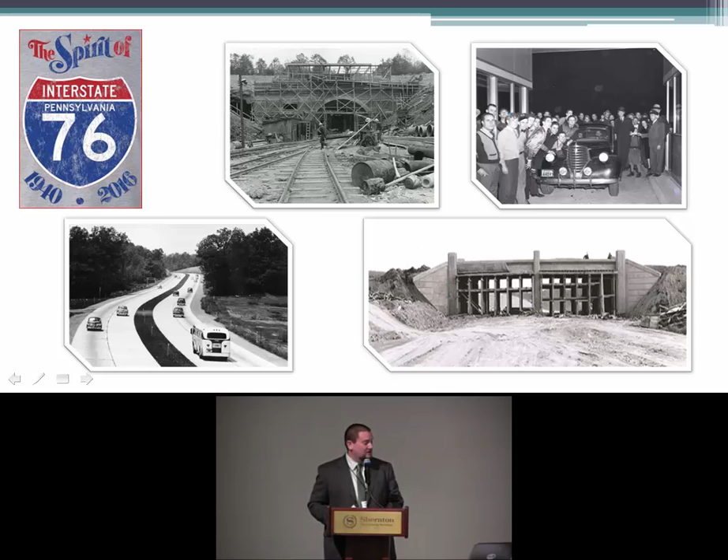Last October 1st, we celebrated our 76th anniversary of the Turnpike, which officially entered service in 1940, exhibiting new concepts in superhighway design and demonstrating that revenue bonds were a way to finance a toll road. Turnpike planners originally predicted that 1.3 million vehicles would travel the Turnpike in a year, but early actual traffic was 2.4 million, with sometimes as many as 10,000 vehicles a day.

The original Turnpike ran from Irwin to Carlisle, 160 miles, and now we have over 550 miles that we own and maintain. We were America's first superhighway, and we continue to work very hard maintaining and transforming that into tomorrow's superhighway.

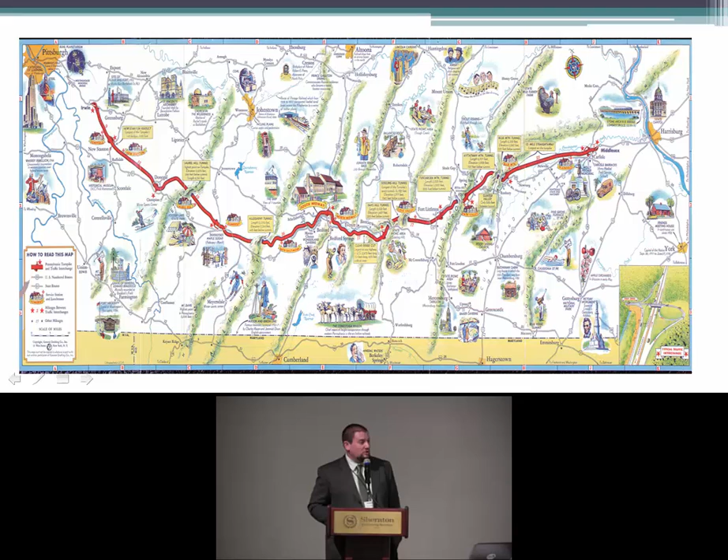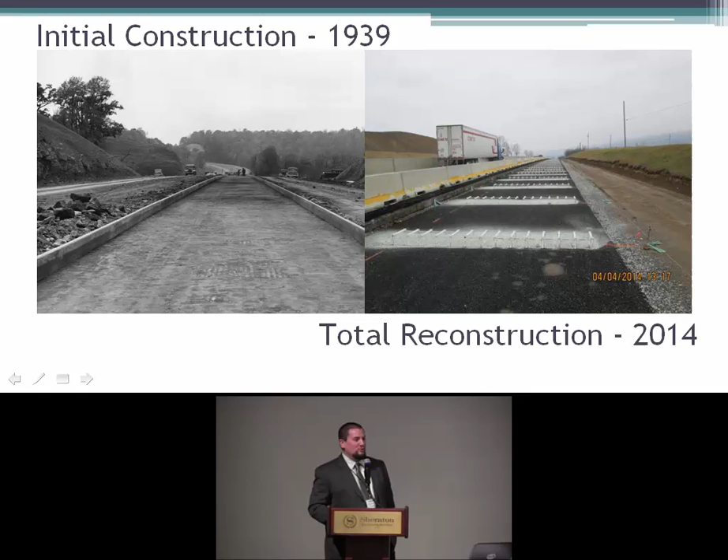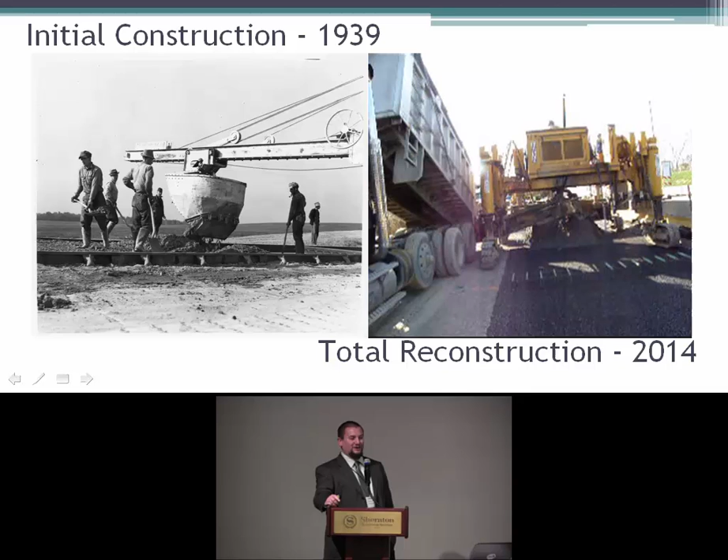Like the concrete industry, we've evolved over the years. In 1939, it was all form work, and now we're looking at all slip form paving. Could you imagine an inspector allowing four different guys with shovels moving concrete around in today's industry, versus material being transferred directly into a vehicle for placement?

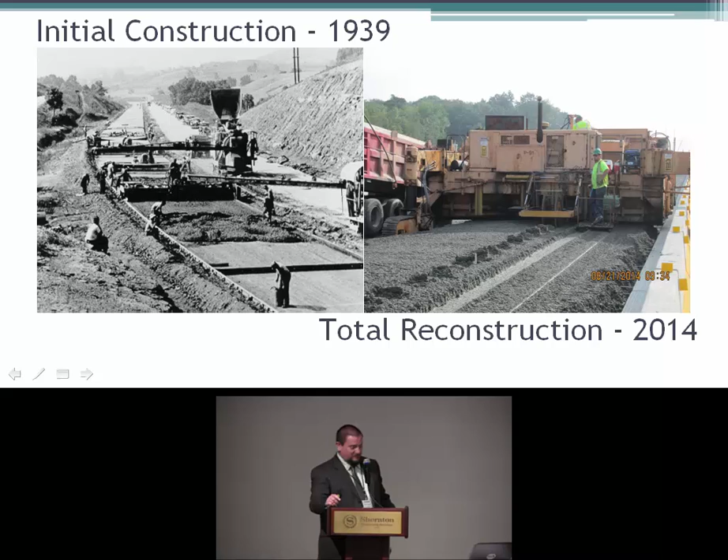That's an actual picture from the Turnpike paving operation in 1939 versus what we did in 2014 with a total reconstruction in concrete. How about a finisher? Really, that hasn't changed that much, in my opinion.

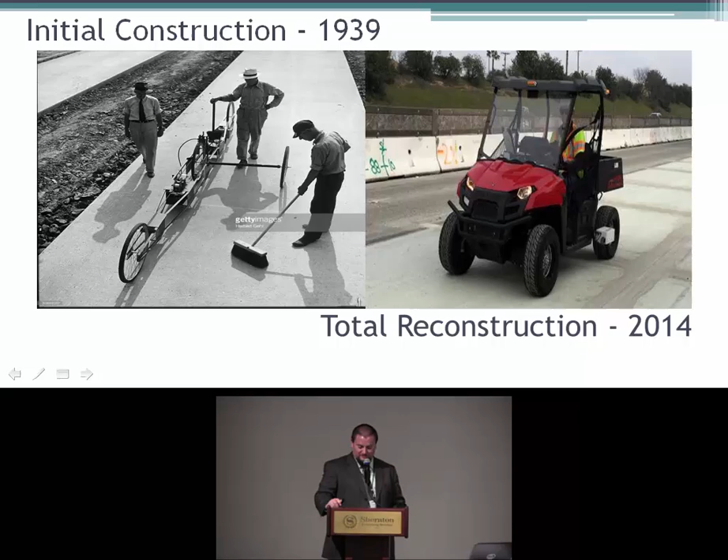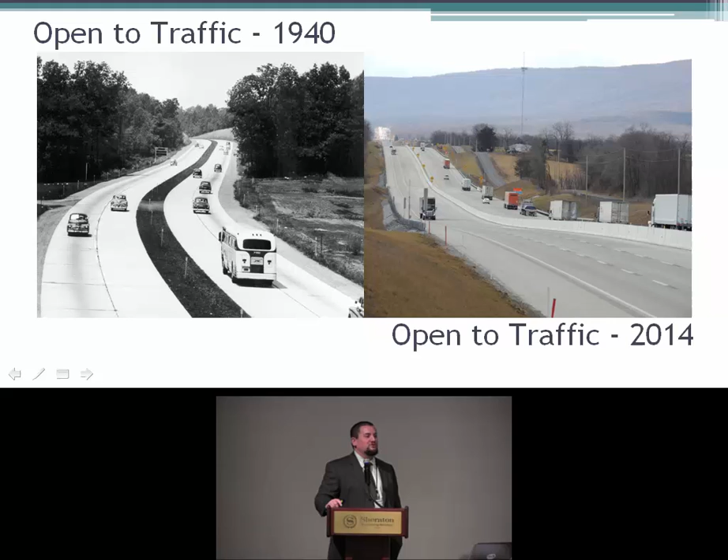But how about an old profilogram versus an ultralight profiler today? There's a big difference in technology and innovation over the last 76 years. Opening to traffic, 1940 versus 2014 with a concrete pavement—the big difference you can see is the amount of trucks the Turnpike saw in 1940 versus what we see today.

Customer service has always been one of the driving points with the Pennsylvania Turnpike. It's clear with our MPT patterns and the time sequence that we allow contractors to set those patterns. But it's through the investment in our capital plan that we're trying to build this bridge to zero fatalities.

For those of you who attended APC back in the fall, Brad Heigl, our chief engineer, touched on this in more detail, so I won't go too deep. But the independent program at $323 million is our Southern Beltway and Mon-Fayette Expressway, which is very actively funded through the oil franchise money from Act 89. I'll provide more detail on that independent program later.

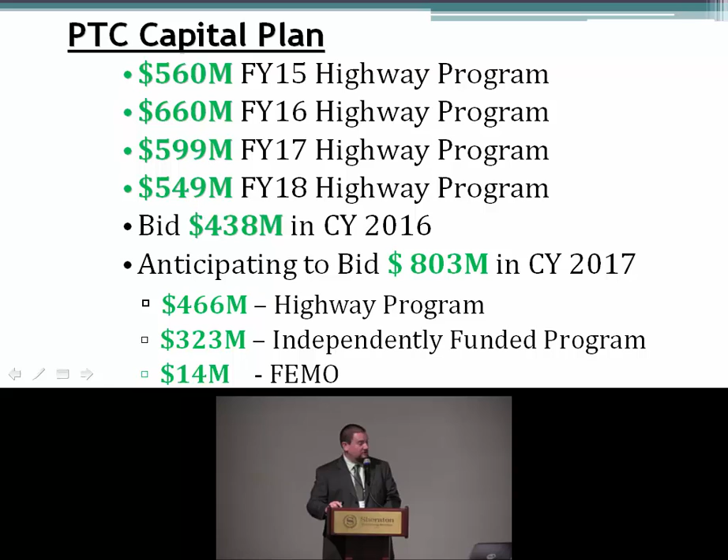We've dropped a little bit to $600 million in fiscal year 17 that we're in right now, and fiscal year 18 drops a little bit more. Previous capital plans: fiscal year 15 was $560 million, fiscal year 16 was $660 million. You can see how the capital plan has grown over the last 5 years.

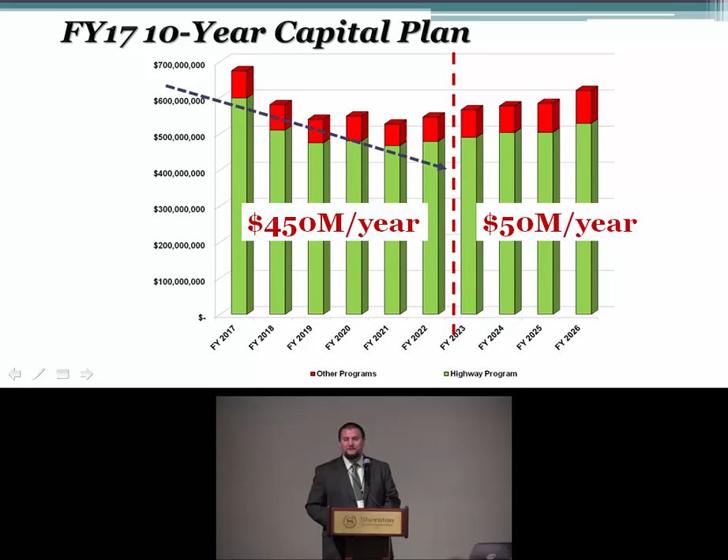So where are we going in the future? In 2022, our payments to PennDOT are supposed to decrease from $450 million a year right now to $50 million a year by Act 89. But there's some concern at the commission that this isn't actually going to sunset, so we want to be in a good position to react if it stays at $450 million or doesn't go down to $50 million. That's the reason we are flatlining our capital plan from fiscal year 17 out.

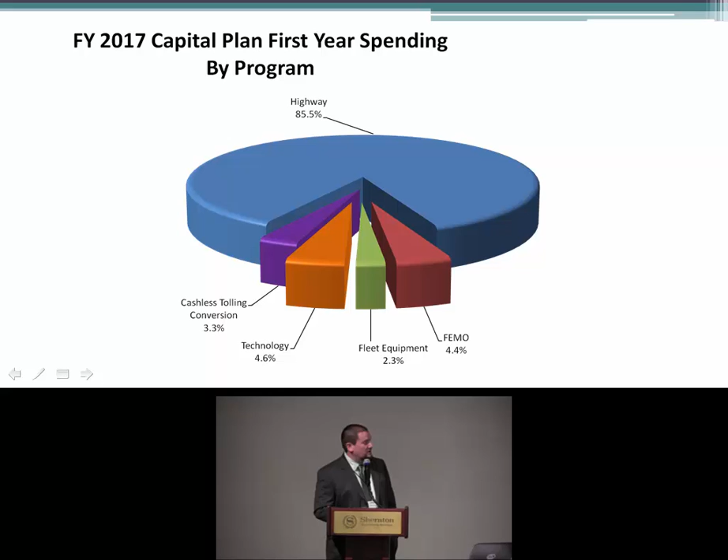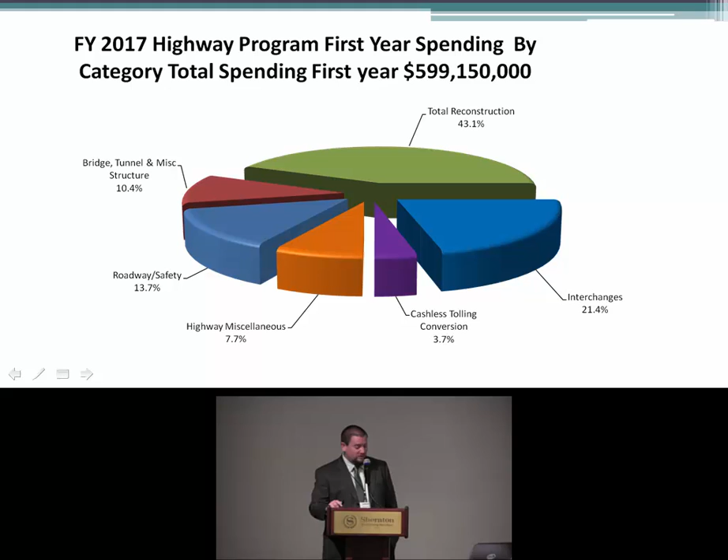Our fiscal year 17 capital plan as it is now, the highway program competes against all the other programs within the commission, but we are by far the largest program with almost 86% of total funding. So how does that break down into individual programs? The big one is our total reconstruction, followed by our interchange program, then roadway and bridge, followed by miscellaneous and our cashless toll conversion.

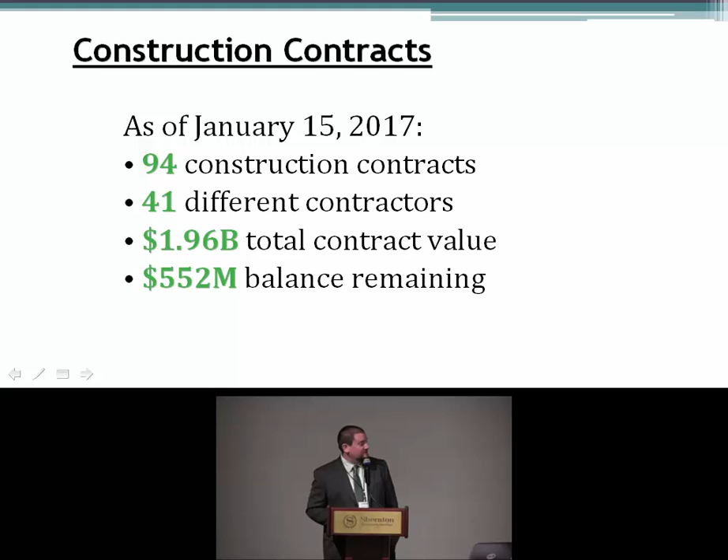So where do we stand today? Well, as of last month, we have 94 active construction contracts with 41 different contractors performing those contracts. A total value of $1.96 billion out in construction, physically in construction or awarded to go to construction, with another 552 remaining for this fiscal year. It's a pretty big number.

So with that program, how do you achieve quality work? One way is through TQI, the Transportation Quality Initiative. We're very engaged and continue to focus on TQI along with John Becker and the concrete industry. We fully agree that the effort that goes into this program and what comes out of TQI is the way that quality transportation projects are going to be implemented across the state.

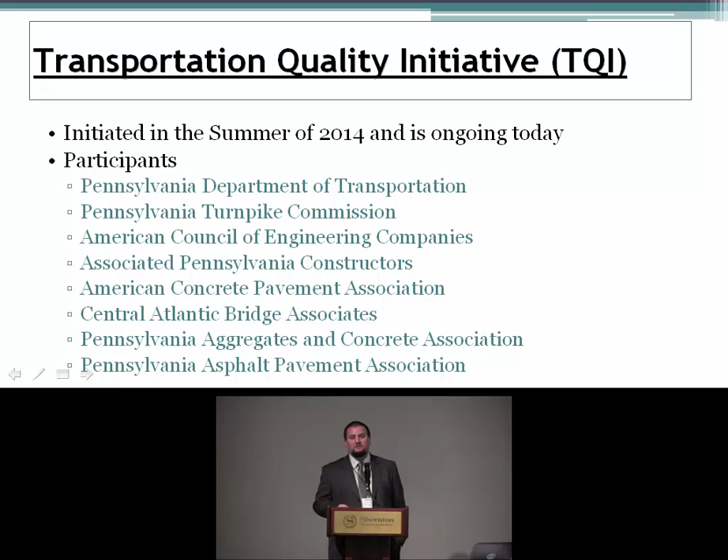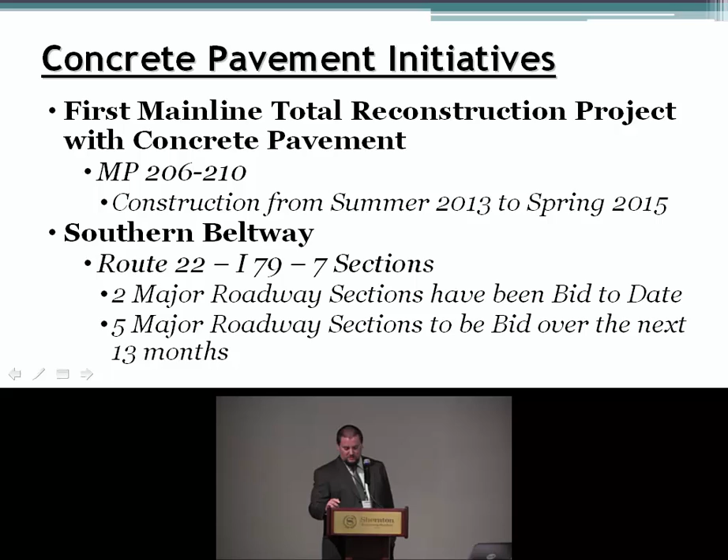So let's talk about some concrete pavement. Back in 2014, the big pilot program that everyone was watching was total reconstruction of milepost 206 to 210 in concrete, which was our first concrete pavement that we did in total reconstruction. Also, we have our Southern Beltway, Route 22 to I-79. There are 7 sections in design. 2 have been bid, 5 more will be bid over the next 13 months.

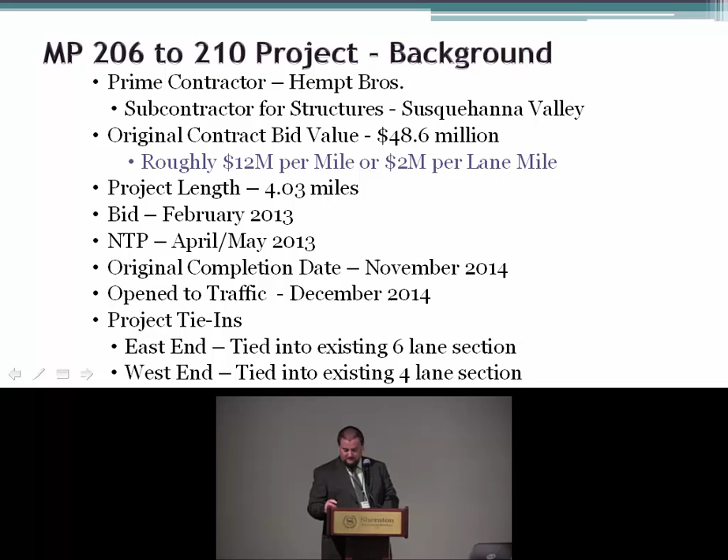So let's touch a little bit more on our 206 to 210 project. Roughly 4.03 miles, about $49 million. What's that break down to? About $12 million a mile, or $2 million a lane mile. But what do we get out of that? So it's been finished, traffic's running on it for second year now.

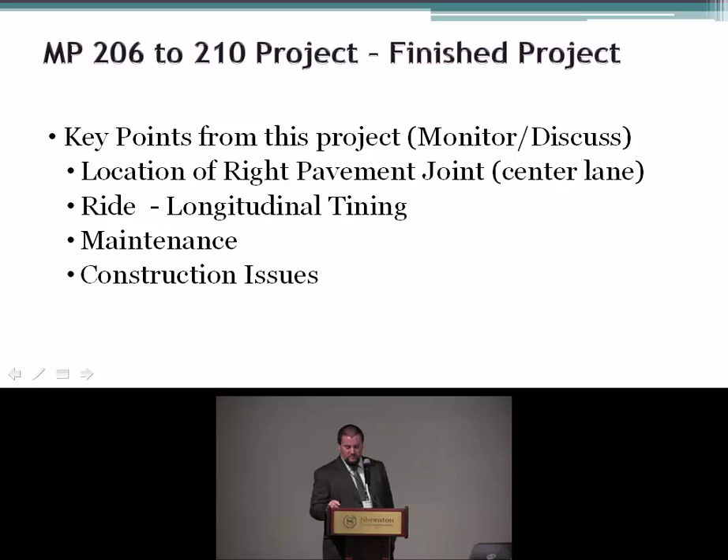Key points that we got out of this project that we continue to monitor and discuss internally: location of the right pavement joint. This just came up yesterday again internally. Our pavement joint is 2 feet into the right lane or the center lane. The ride quality, longitudinal tining, long-term maintenance of this pavement, and construction issues that came up that we're still discussing.

When you break in all your bridge structures and your culverts, you have to account for all your gaps for your EPOs, your contractor access. So you have to be aware that when you're paving concrete, you're going to occupy 2 lanes, and when you're only building 2 lanes at a time, this comes into a real problem. You also have your post-pavement restrictions, your cure time, your sawing and sealing. You also have to consider our median drainage was designed very shallow, so we couldn't run in the median until it was paved, which caused construction issues.

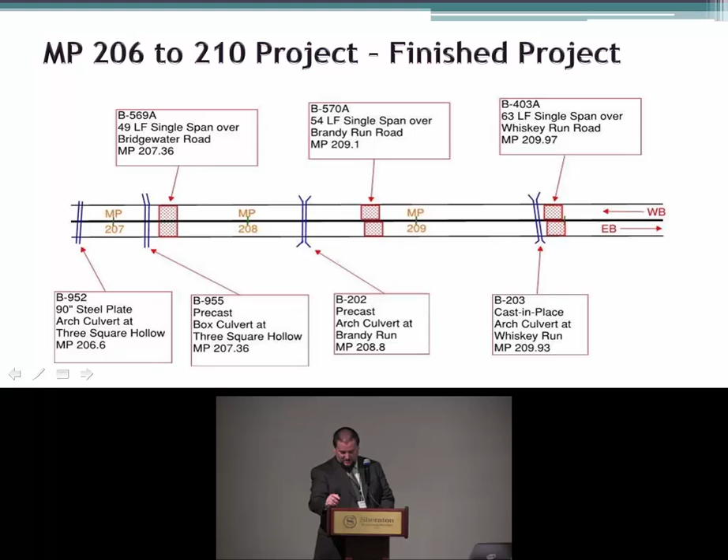Construction staging is always on the mind. When string lines are used for grade control and dowel baskets are placed every 15 feet, and you're working in a 29-foot work area, that gets pretty tight.

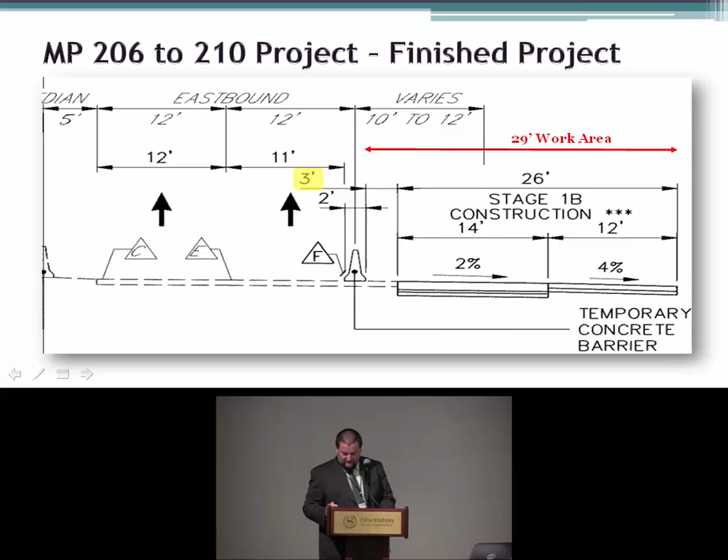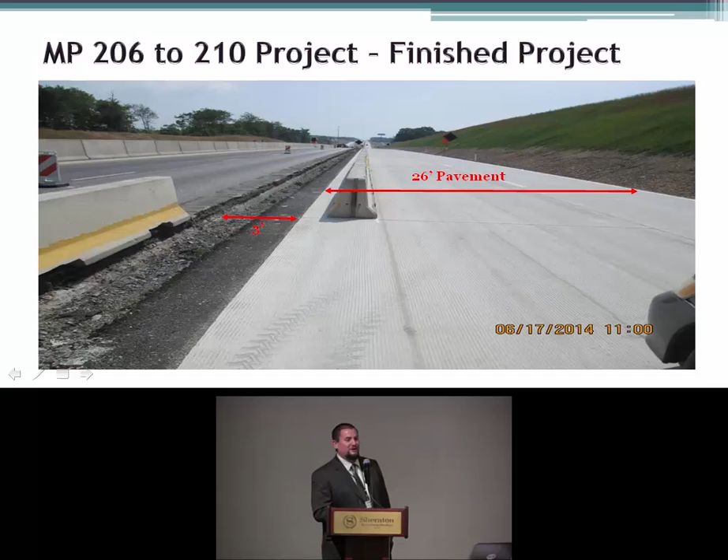So your access for your equipment drives a lot of this. One way they came up was we designed that 14-foot center lane, or 14-foot right lane, next to our 12-foot shoulder. Where this really comes into play is you have to maintain very tight edge slump on that 14-foot lane. All these elements drive to one thing, and that's workmanship. The workmanship provided by the finishing crew is absolutely key, but this job for them gets more complicated. When you only have 3-foot buffer area from the edge of your concrete to the edge of your adjacent travel lanes, that gets very difficult for crews to stand in there and perform adequate work.

But reaching the desired IRI numbers was also a challenge for us. The preliminary numbers were in the 80s, probably slightly inflated, you know. It's never a perfectly clean surface. You have those bumps, you have those pebbles that are still out there. But it's probably about 80% that we have to grind, which was probably a significantly higher number than the contractor anticipated having to grind. But once we ground it, we got the numbers down into the 60s.

A lot more issues came up with the contractor's equipment. Now, it's tried and true equipment, but it's not today's technology. It's not all electronic, but being a public agency, we have to kind of hedge our bets. You can't write the specs so tight that we exclude certain companies because they don't have the equipment that we want to see used, but you need to have a cost-effective project.

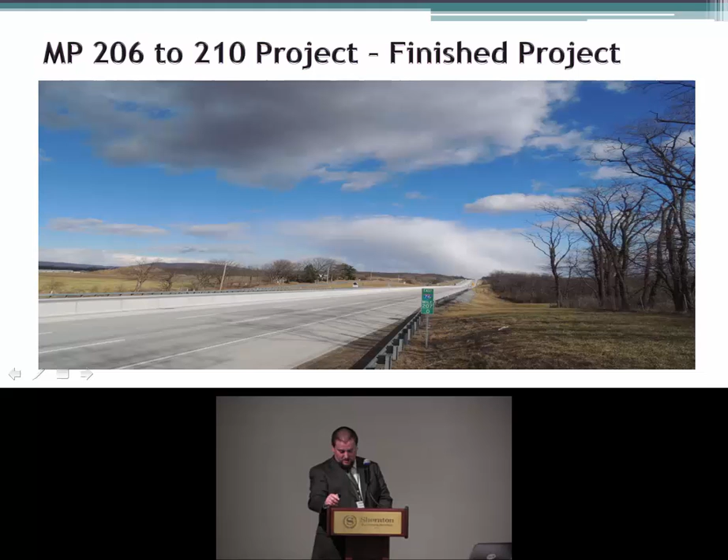So all in all, what came out of that is it was a much more difficult project than a typical total reconstruction for us. But what we're hoping is the payoff down the line from placing concrete out here will help with the life cycle of this section. So let's go from the south central region of the state to the southwest and talk about some Southern Beltway.

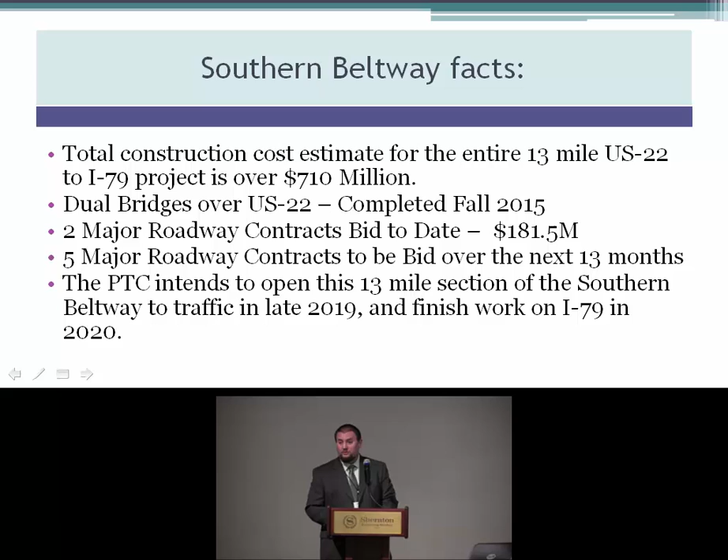The total construction cost for the entire 13 miles of the US 22 to I-79 section is estimated over $710 million. The dual bridges at US 22 have been completed since the fall of 2015. We've bid 2 major roadway contracts valued at just about $182 million. Again, 5 more major roadway contracts coming out over the next 13 months. And we intend to have the entire 13-mile section of the Southern Beltway open in late 2019 with the finished work in 2020.

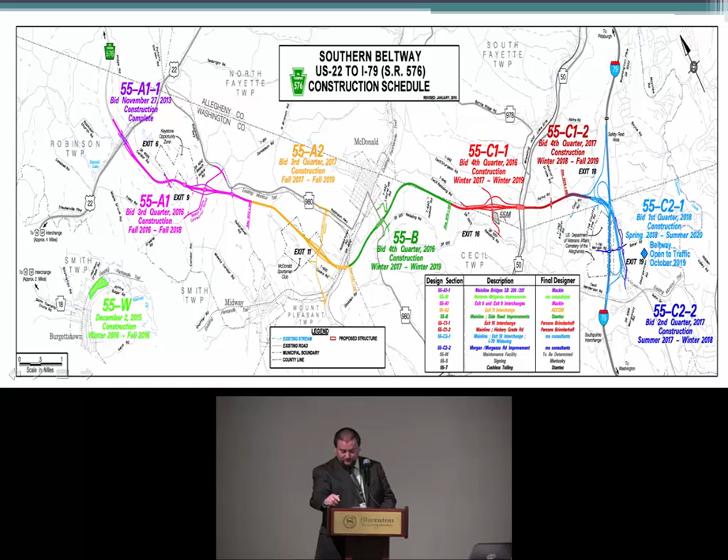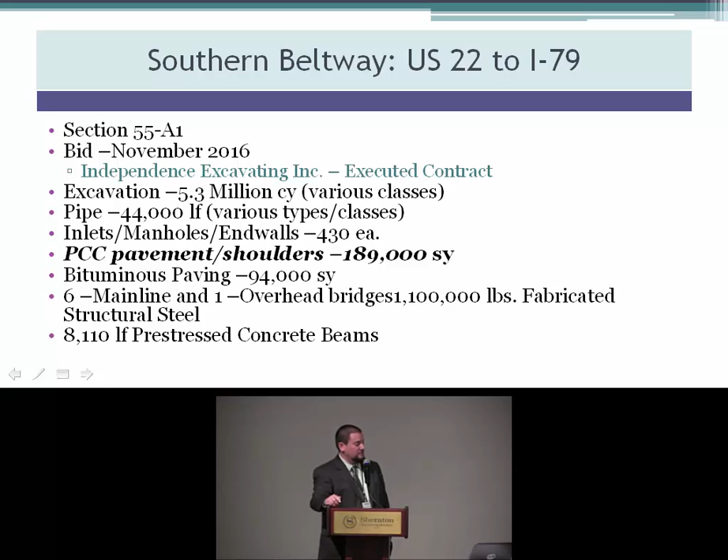So the first section of the Southern Beltway was bid back in November, and Independence was the low bid, as we have approximately 190,000 square yards of Portland cement concrete pavement and shoulders. The second section was bid in December, and Fay was the low bid. We have about 123,000 square yards of concrete pavement in this section.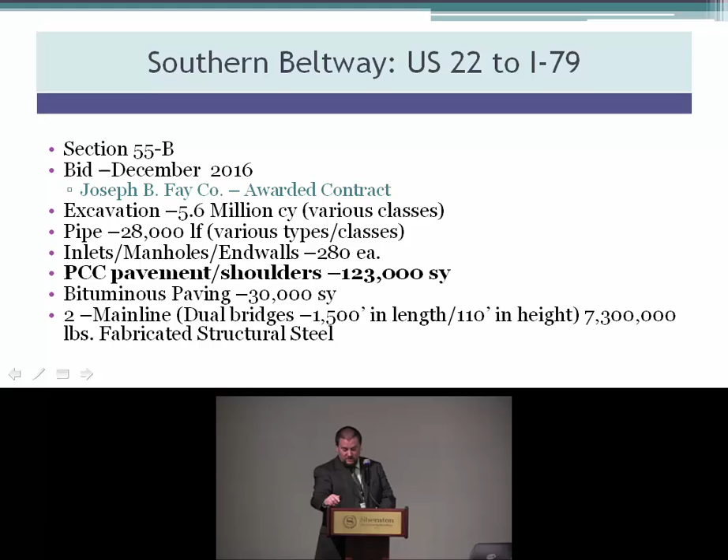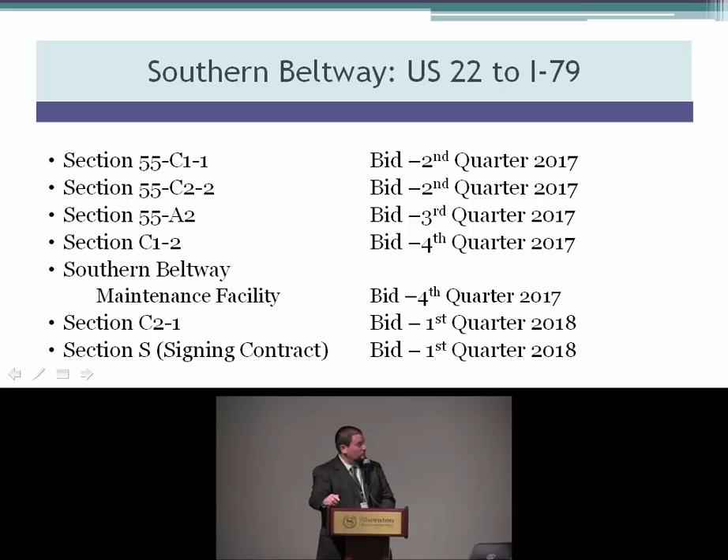So the next 5 sections you can see here, second quarter for 2 sections, a third quarter, and a fourth quarter. We throw in a new maintenance facility down for Southern Beltway to maintain this. We bring in our last section in the first quarter of 2018 for bid, and then we build a signing contract which covers the entire 13-mile corridor in the first quarter of 18. So this is what our current 6-quarter letting schedule has us at.

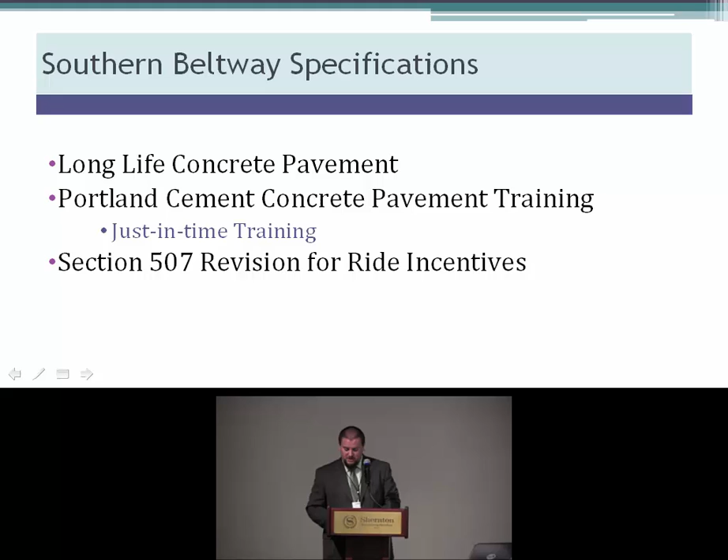So the Southern Beltway specifications, this was touched on a little bit earlier. We do have our long life pavement specification. We do have a Portland cement concrete training spec, and we have a revision to section 507 for ride incentives. These did come out of TQI and CPQI for improved quality down here.

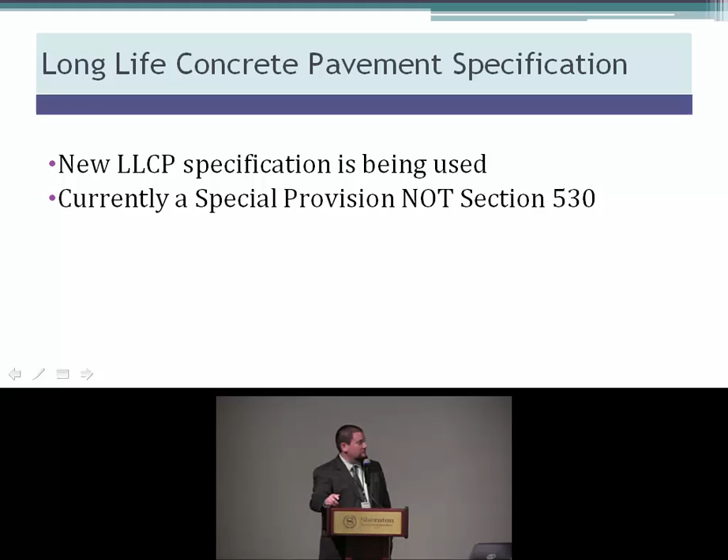So there is the new long life specification that's being used. It is a special provision. It's not straight Section 530, and that's going to be the way it is for all the other 5 sections that are out there to be coming.

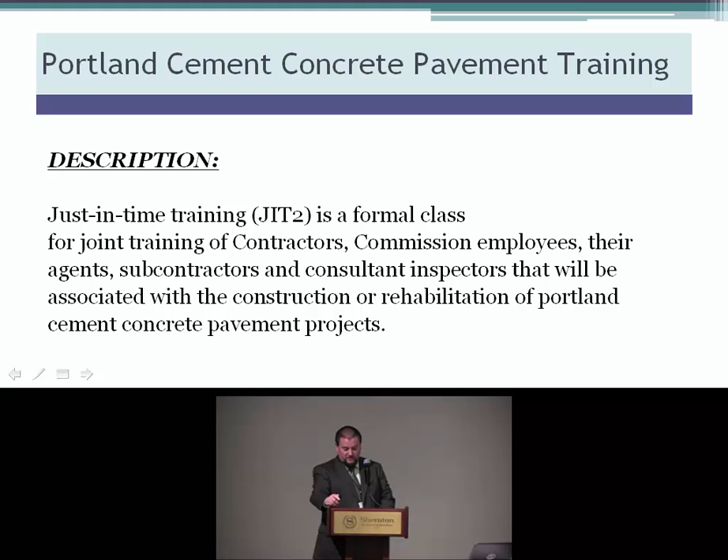Probably the big thing down here is the Portland Cement training program, commonly referred to as just-in-time training. So it is a formal class for contractors, commission employees, and all the agents for both sides. It's associated with the construction or rehabilitation of Portland Cement pavements.

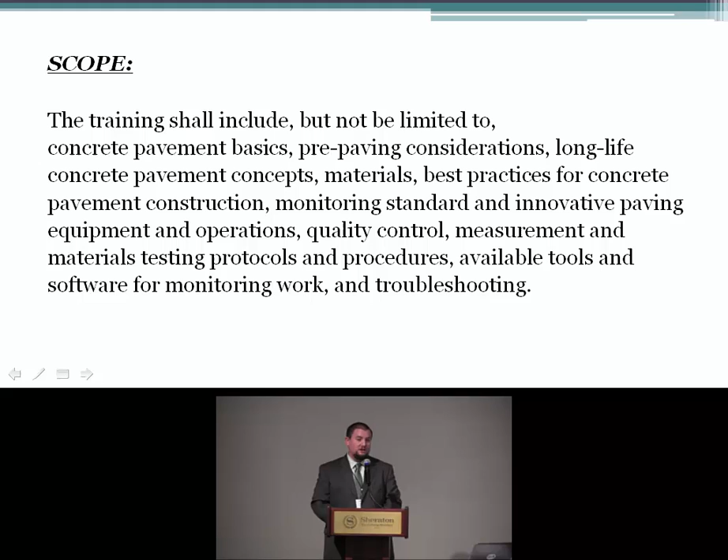Contractors are to use a recognized pavement or recognized concrete pavement best practices and guidance documents that are out there for training materials in this class. They are to provide instructors experienced in specified pavement specifications, construction methods, materials, testing, and knowledge of the best practices. They are to be led by a professional engineer in the state of Pennsylvania.

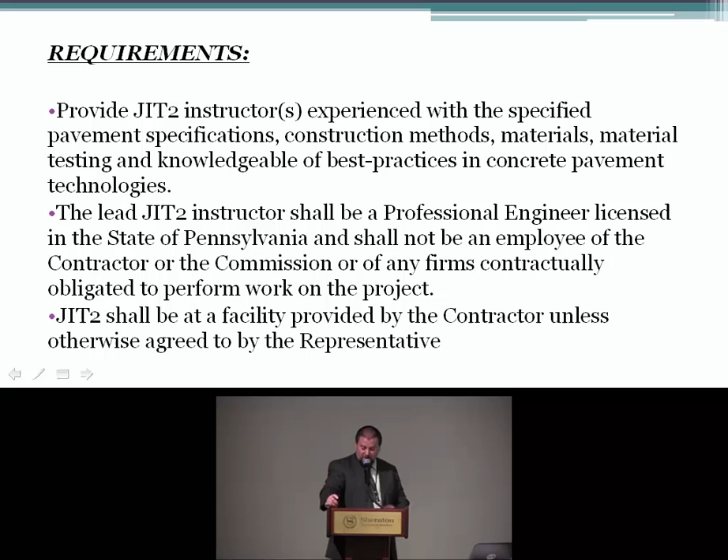They cannot be an employee of the commission or the contractor, and they have to provide the facility to hold this training. So who's required to go? Representing the contractor, the paving superintendent, the foreman, the mechanic, the operators, paving crew, the plant technicians, sealing representatives - pretty much everyone that you can think of that is involved in the concrete paving aspect from the contractor is required to go.

Representing the commission, the project engineer, the assistant engineer, the materials manager, the main office pavement and construction staff, and the key inspection. So again, everyone that is integral to the actual paving operations or the material testing and approval is required to attend this training.

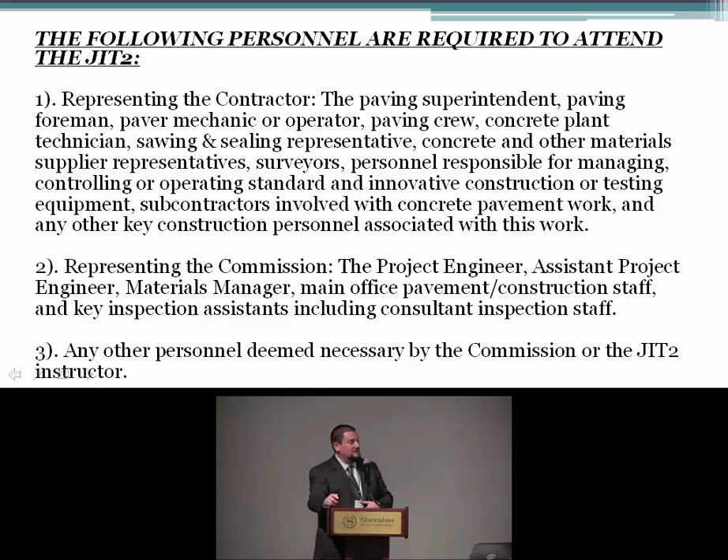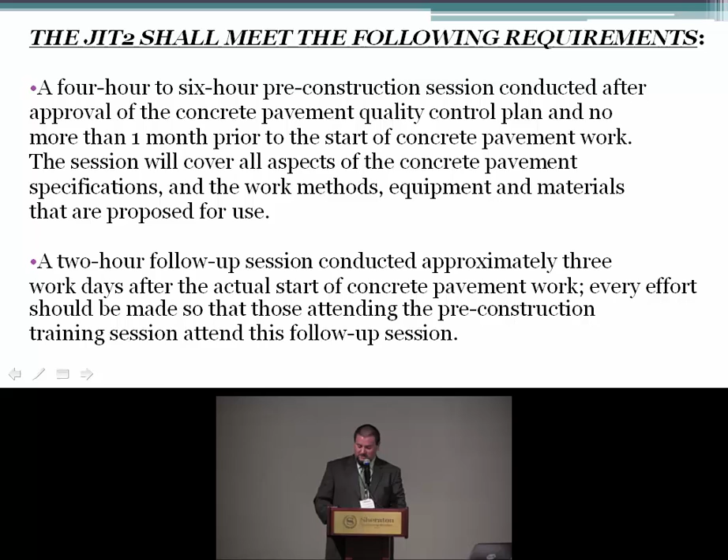So what is it? Well, it's going to be a 4 to 6 hour class. Sessions have to be approved no more than a month prior to the start of the concrete work, and it has to cover all the aspects of the pavement specification, work methods, equipment, materials that are proposed for the actual job. And then you have to have a 2 hour follow-up session approximately 3 work days after your construction commences with placing your concrete to make sure that we are following those best management practices.

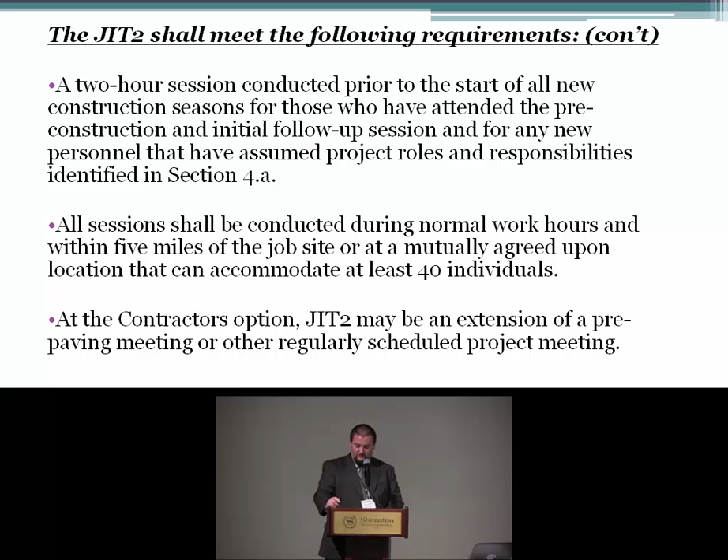Additional requirements - clear specs, right? A 2 hour session conducted prior to a new construction season or for those that weren't involved in the prior season or new employees. All sessions have to be conducted during normal work hours, and they can be part of the pre-paving meeting or a regular scheduled project meeting.

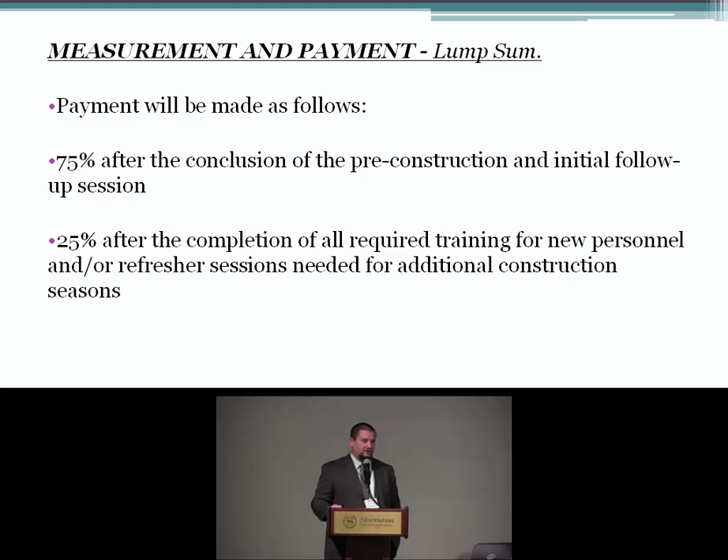How is it paid? We pay for 75% of it at the conclusion of the pre-construction and the initial follow-up, and 25% gets paid in the following season after the refresher course.

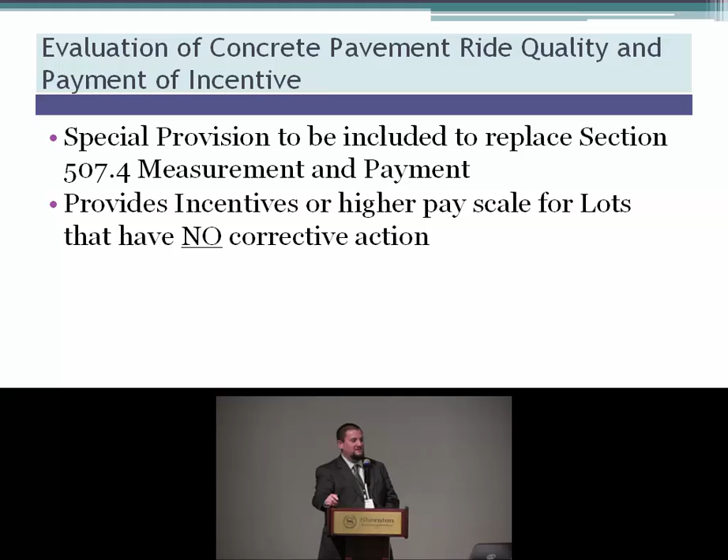So where are we going with the ride quality and the pavement incentive? This is a special provision to replace 507.4, which is the measurement and payment, and it provides incentives, or a higher pay scale, for lots that have 0 corrective action. And this is probably the big thing for us - if you place a lot that requires 0 corrective action, we're going to pay you more.

Defective lots may still stay in place as long as it's approved by the assistant chief and the contractor accepts a $4,000 downward payment or a rebate to the commission. So that's kind of where the Turnpike is with concrete initiatives and the history of us.